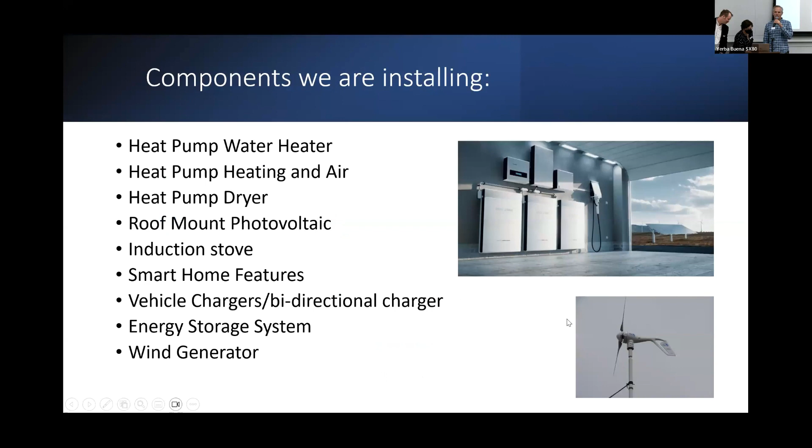I did want to add, when Kellen talked about power outages in Marin County being a primary consideration, I had a very visceral reaction, because I still remember from a few years back when we had an extended power outage, and my wife took our kids and went to Petaluma to her parents' house and left me there, and the fridge went out and I had no food and I got really, really hungry. And I remember finally a cafe opened and I got a panini, but they couldn't grill it. So I still remember I was basically eating a ham sandwich with butter on the outside of the bread.

Anyhow, I digress. Is my presentation up here? Yeah. Got it. Okay.

So I have an architecture firm and I specialize in high performance modern homes. And the technical underpinning of that is passive house or passive building. I'm assuming many of you are familiar. I'll do a quick introduction to that and then talk about a couple examples and then a quick discussion of how code and passive house align and don't.

So what is passive house? It's a rigorous building design and performance standard. It was formalized by European scientists around 1990, and it drew a lot on super insulation and passive solar work in the United States from the 70s, and also low energy building work in Europe following that.

And it sort of turns everything on its head, in my opinion, and it defines the quality of a building by how little energy is required for comfort and convenience. And it offers superior comfort, indoor air quality, and durability. And there are tens of thousands of these worldwide at this point, not just single family, but multifamily, commercial, institutional buildings.

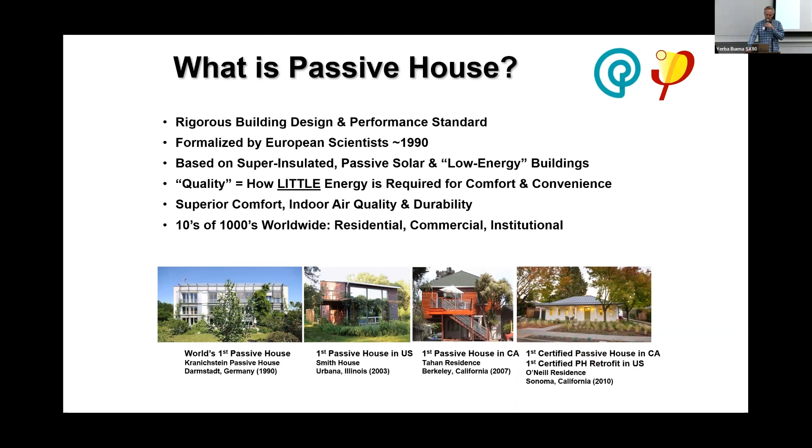And I had the honor of working on this. This is in downtown Sonoma, city of Sonoma. It's called the O'Neill Residence, if you want to look this up.

Anyway, how does passive house work? Optimize solar gains, so particularly in a climate like this, not just getting solar gains in winter, but excluding them in summer. A draft-free building shell. Heat recovery ventilation is typically used. Continuous insulation, high performance windows and doors, efficient equipment, appliances, and lighting. And lastly, this is where it maybe gets a little weird, renewable energy at the end of the list. We'll talk a little bit more about that.

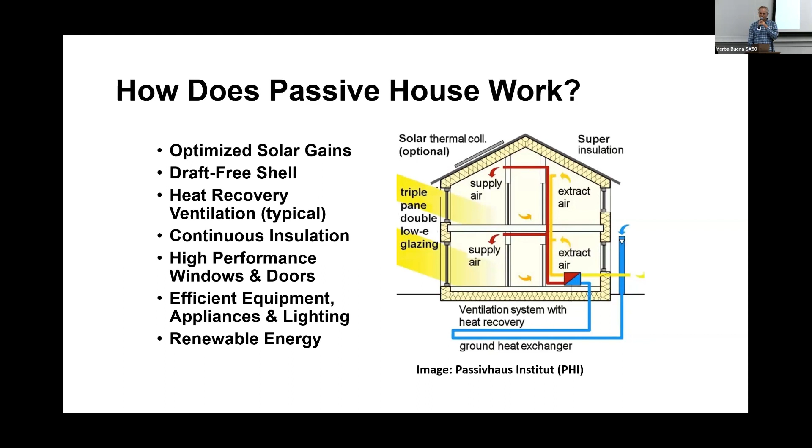Benefits of passive house: health, 24/7 filtered fresh air. We've also been doing a lot of work dealing with wildfire smoke in these buildings. Because you have control over the air entering the building, you have the opportunity to filter it.

And we've found that adding supplemental HEPA filtration at the intake to the ventilation system, you don't want that there all the time because it ups the fan energy a lot. But if you can make that convenient to insert and remove, it's very effective during wildfire events at keeping the indoor air quality high. It's a durable shell, free of mold and moisture problems. In the wealth department, tiny energy bills, high quality construction.

It's immune to changing energy prices and policy. And a thing I like to talk about is I view these buildings as thermal batteries that can store their heating and cooling. And we'll see some examples of that shortly. Happiness, safe, healthy home for the occupants and the planet, legacy buildings, quiet, secure, and comfortable interior. And I also refer to these with my clients as sanctuaries in the modern world.

I've been doing this since 2008. And every time I go into one of them, I'm really taken by how quiet they are once you get inside, with the doors and windows closed. If you want to hear birds chirp or cars go by, open the window, no problem. It's just that you can close them if you want.

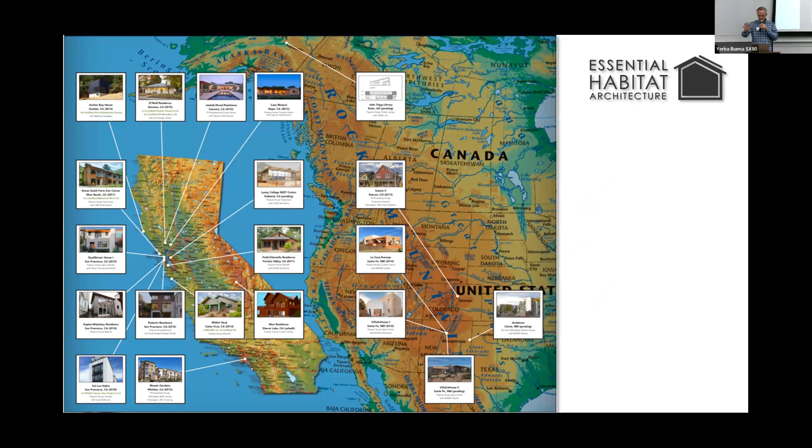This is a kind of a snapshot of projects that we've worked on since 2008, give or take. There are a few more in the works and a few more not on here, but we've been at it for quite a long time. Most of our projects are clustered in the Bay Area, but we're always looking to stretch out and expand to the other 15 climate zones that we have.

This is the first project I just wanted to examine. So this is the before. This is called Midori Haus in Santa Cruz. It was a 1922 craftsman, and we remodeled and retrofitted it to passive house. That's the front view. We talk about indoor outdoor living, not a very inviting connection to the backyard in the first place, but our remodel did a lot more to connect the occupants to the landscape.

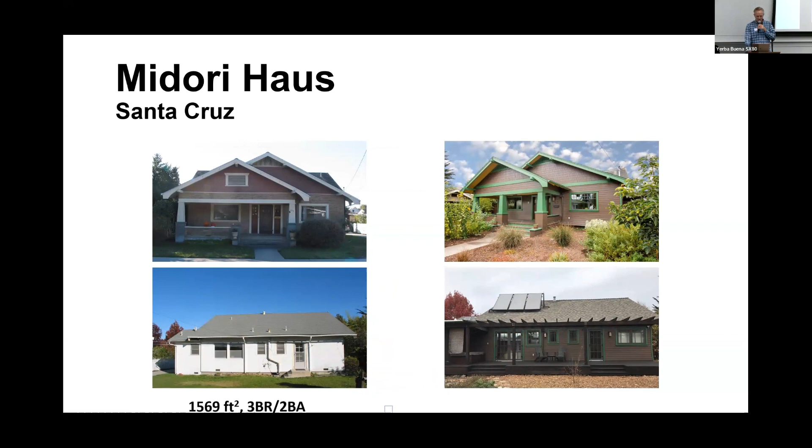This is the existing floor plan and the revised floor plan, and the clients didn't want to expand, so we just reconfigured and utilized the interior space, added decks to the outside, adjusted some of the glazing positions, and just made it updated for modern living.

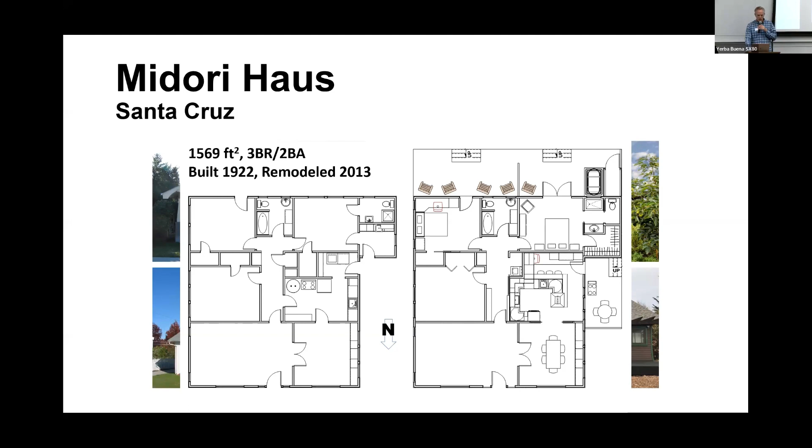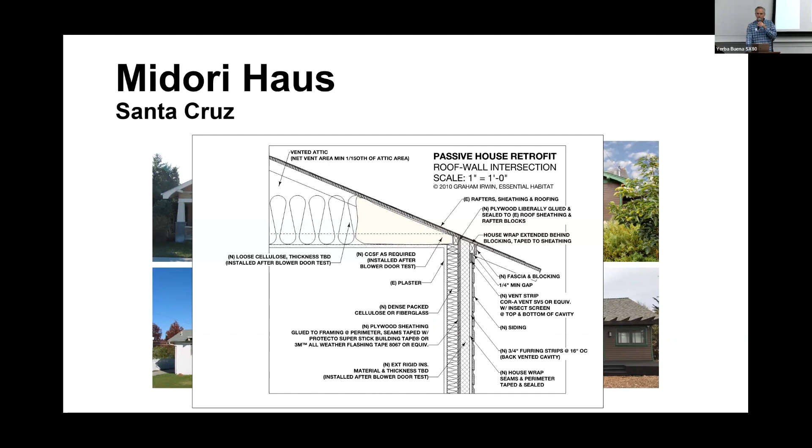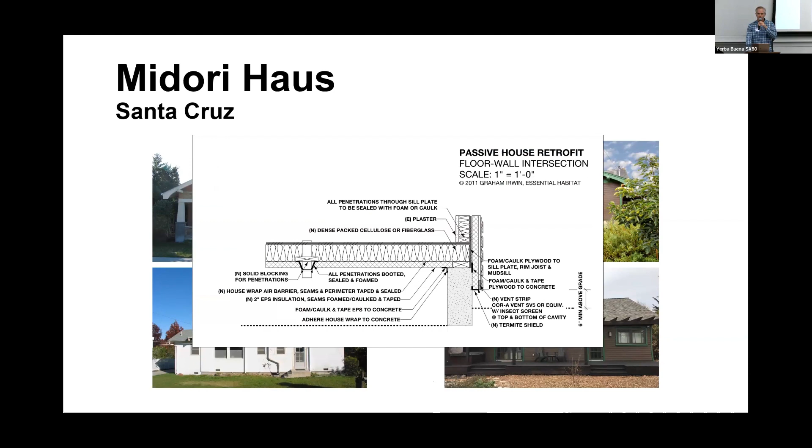And this is a detail of connection. We basically re-sheathed the building, put 3¼ inches of exterior rock wool insulation on the outside. That's basically the wall. Took a lot of care to make sure it was air sealed, but not insane amounts of insulation or any materials like that. Likewise on the floor, the main exercise here was getting the air sealing done. And I heard from the contractors that crawling around in the crawl space doing that was not much fun. So you do what you got to do.

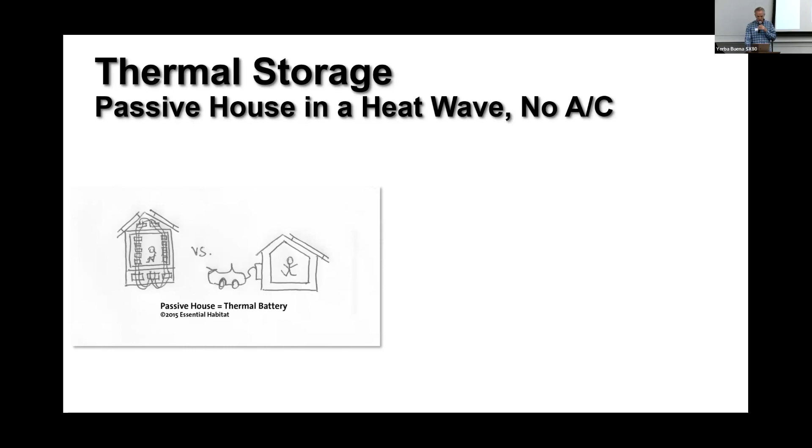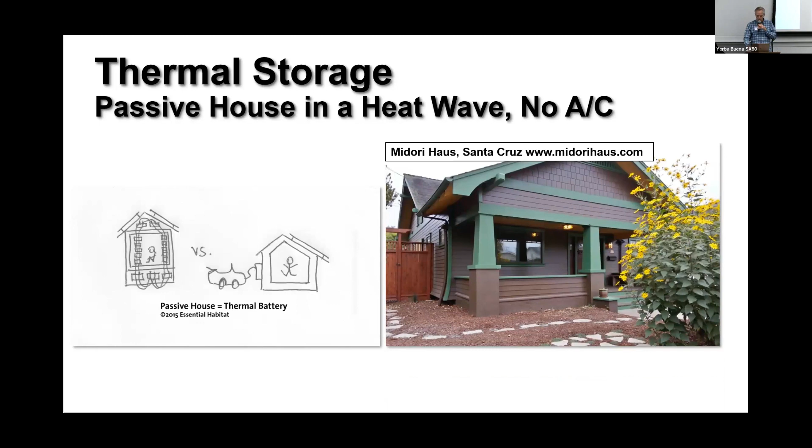So here's an example again of Midori Haus, in Santa Cruz, and it has no air conditioning, but they do have freak heat waves now and again. So their cooling is night cooling. When it's evening, night, or early morning, they'll open the windows to let cool air in, and then they close the windows and doors to get through the day.

There was a heat wave in May. Apparently these happen there. It got up to 103 outside, and the warmest temperature during that day was 76 degrees inside, with no cooling whatsoever, with the ventilation system running as well. So even if you're in a climate that does require air conditioning, this kind of resiliency enables you to conveniently run your air conditioning.

You don't need to run it at peak time. You can choose what time of the day or night to run it because the building itself can hold that temperature. Likewise, in the winter, it can hold the temperature. So you could choose a convenient time to run your heat pump, be it when the sun's out and the solar panels are running or whatever. It lets people adjust and decide when they condition their home, not be forced to follow peak conditions.

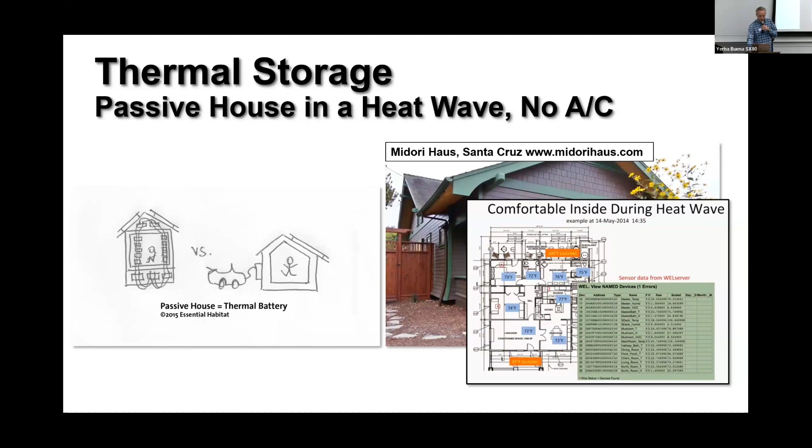In terms of seasonal demand, this is just a look at their electric and gas bills. And this building, this was done in 2013. So it has a solar thermal system with a gas boiler backup. The solar thermal system or the hot water system of the house provides the hot water for the house and also provides the heating. But if you look on the right at the utility bill, I think what's most striking is the relative lack of peak through the year.

You know, typical building on the right and the efficient ones, in winter, the gas use spikes, and this one's almost flat year round. So it's doing an excellent job of mitigating what will be the biggest challenge in an all renewable grid. Air conditioning is not the biggest problem, not even close, because you have solar at the time, even if it's a few hours removed.

The hardest thing is providing power in winter because you need a lot of heating. And the reason you need a lot of heating is because there's not a lot of sun out. So solar doesn't help you heat because you need heat because there's not enough sun. You know, it's not an inconvenient situation. It's actually caused by that.

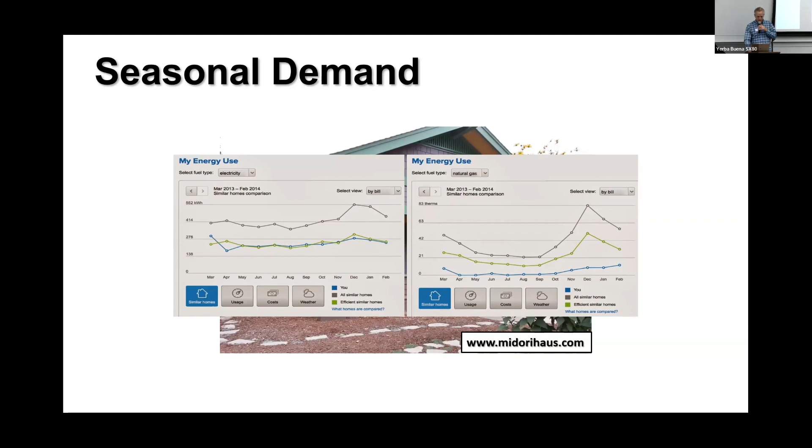Anyhow, the efficiency measures of this building, the fact that Passive House utilizes internal heat gains as well to help warm the building, enable it to get to these levels where there's still heating needed, but much, much flatter year round. And this is just looking at their actual energy use and comparing it to a typical house.

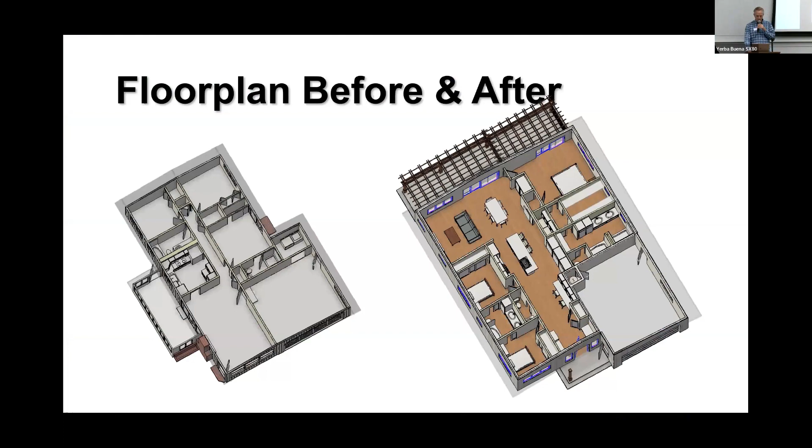This is another project in Sunnyvale in 2019, a mid-century house that we remodeled and retrofit to Passive House. Again, not a terribly inviting rear facade. To get to the backyard, you had to go through a bedroom and out the side. And we changed it to this floor plan, before and after. This one was expanded somewhat, but we basically kept largely to the same footprint, but kind of squared the building off and made it a lot more livable for the homeowners.

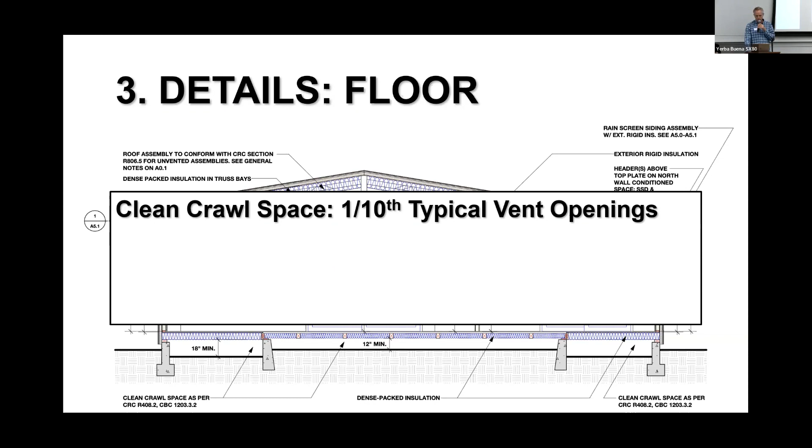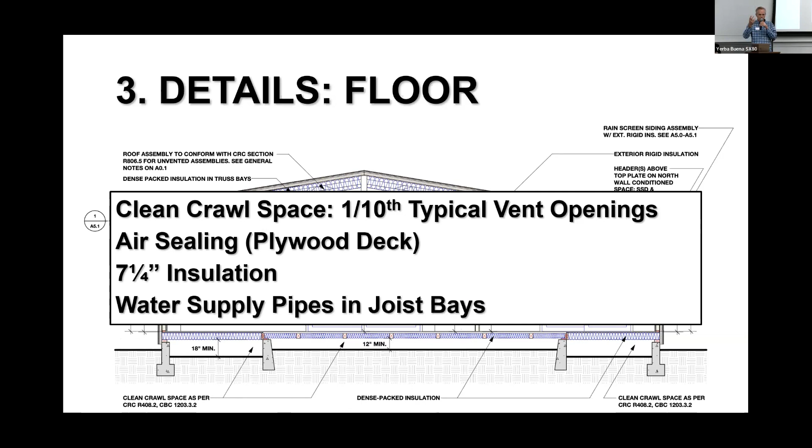Details of the floor on this one. We did a clean crawl space, so we reduced the vent openings to 1/10 of what they typically are in a standard code crawl space. Did the air sealing of the floor at the plywood deck, 7 1/4 inches of insulation, and moved the water supply pipes into the joists so that they're actually inside the envelope rather than outside.

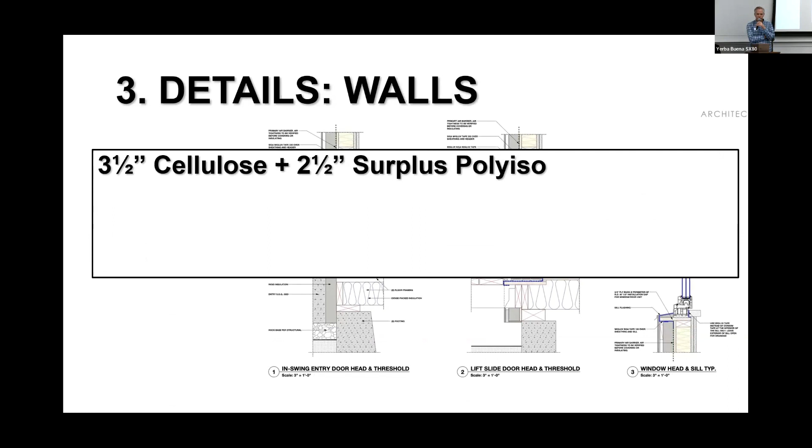The walls, just 2x4 walls with dense pack cellulose and 2.5 inches of surplus polyiso insulation. The contractor located a batch of it, I think, that had been taken off of a warehouse or something. And so they had a stack of that, used that on the outside of the walls. The walls were sheathed with ZIP sheathing, and that was the air sealing strategy for that.

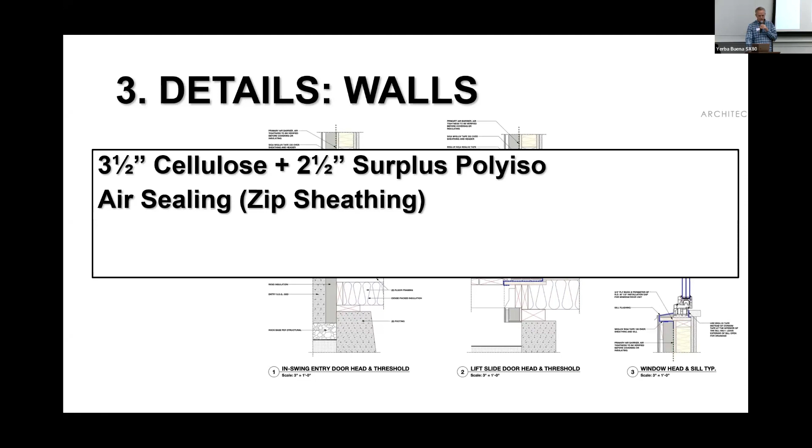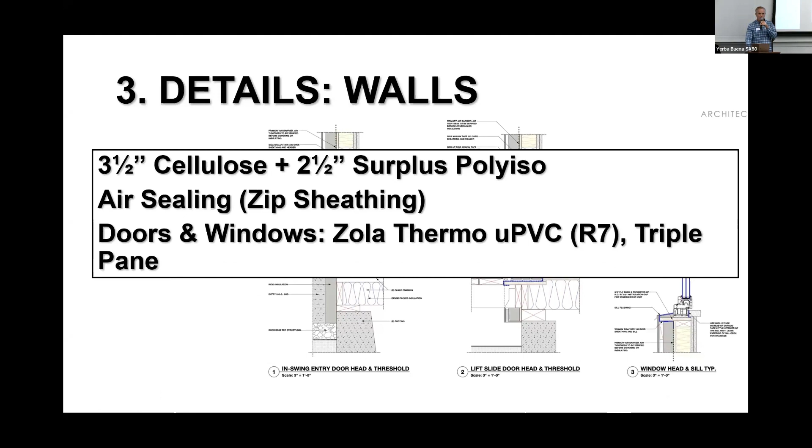And the doors and windows are a European company that we use quite a bit, and they're an R7 window as opposed to an Energy Star, which would be an R3, and it makes an enormous difference in the performance of the building shell.

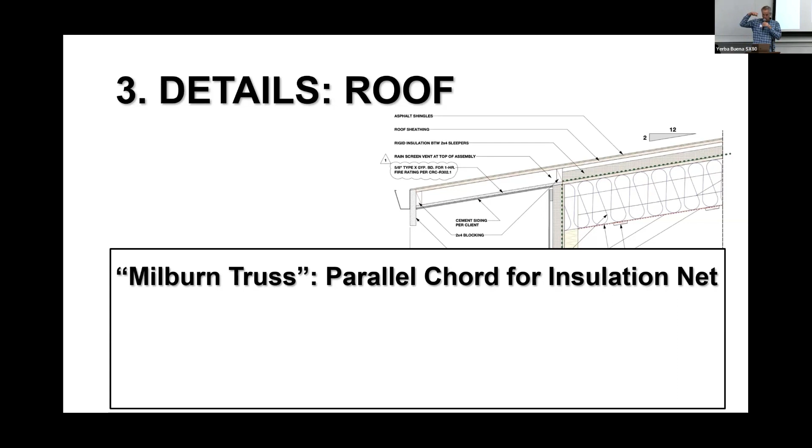The roof, I kind of named this after the builder in Sonoma who I thought came up with this idea, but if you look at the truss, there's an extra parallel chord added to the truss, and that's strictly there just for stapling the netting of the dense packed insulation so that you can do dense packed cellulose easily up against the roof sheathing. And again, ZIP sheathing, the overhangs are actually attached after the air sealing. So we want to get a really good air seal from the roof sheathing to the wall sheathing.

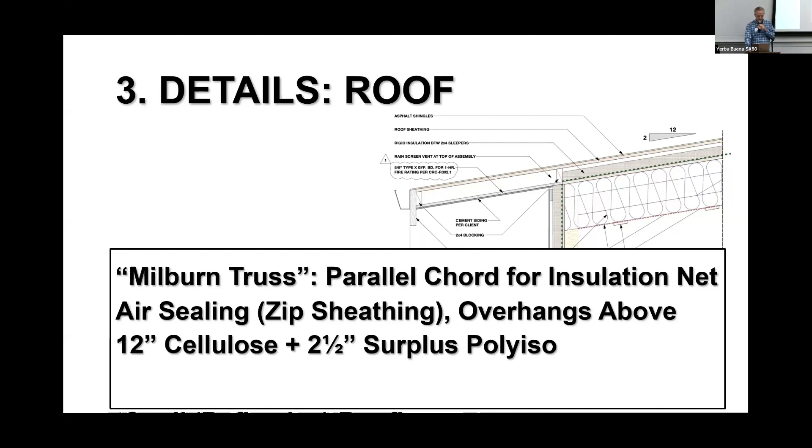So the building ends up first starting with no overhangs at all, and then they're added on top, interspersed with the rigid insulation that we use to give us an unvented roof cavity. 12 inches of cellulose, and again, 2.5 inches of polyiso. And we also use cool or reflective roofing.

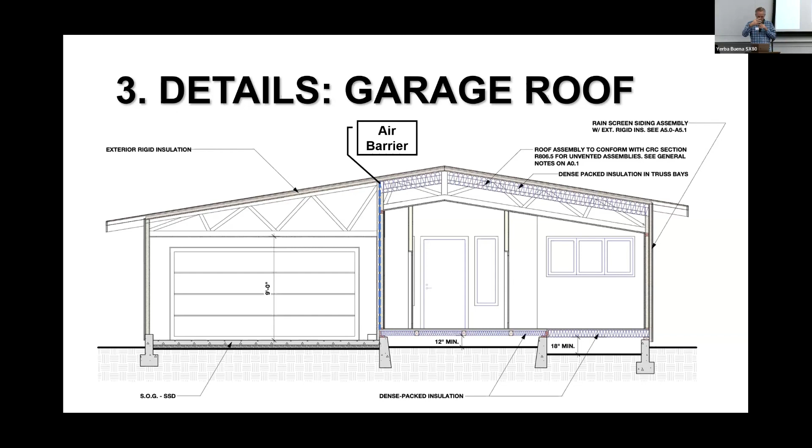Example here in the garage, just thinking through the air barrier situation: in an attached garage, we did a split truss where, even though the roof looks continuous, at this point it's actually split so that we could guarantee that we had wall sheathing connecting to the roof sheathing outside of the garage to keep that unconditioned space separate. And it's also good for indoor air quality.

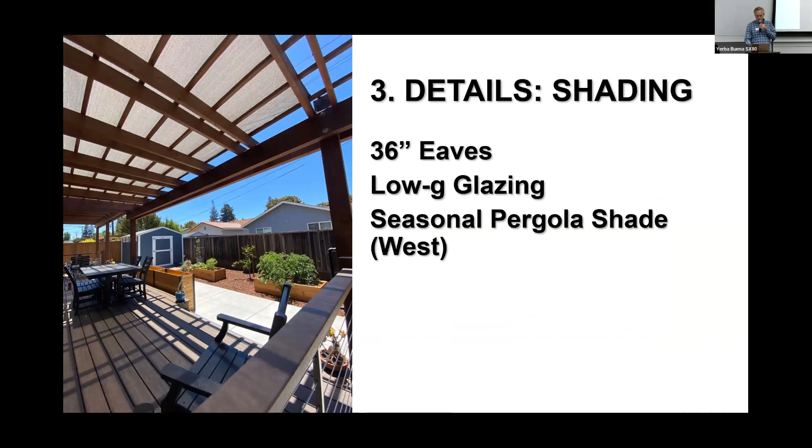The shading details: we did 36-inch eaves, low solar gain glazing. This is the west side of the building that has a lot of glass, but there's a pergola on it with a shade cloth. It could also be done with plants. And then looking at the energy use.

So the client decided that he didn't want to put his photovoltaic system up until he had a year of operation to size it. And then apparently had some difficulties with the fire department because they added Tesla Powerwalls. And so there was some kind of back and forth for months over that. Anyway, the short and long of it was it didn't get fully grid interconnected until the beginning of this year.

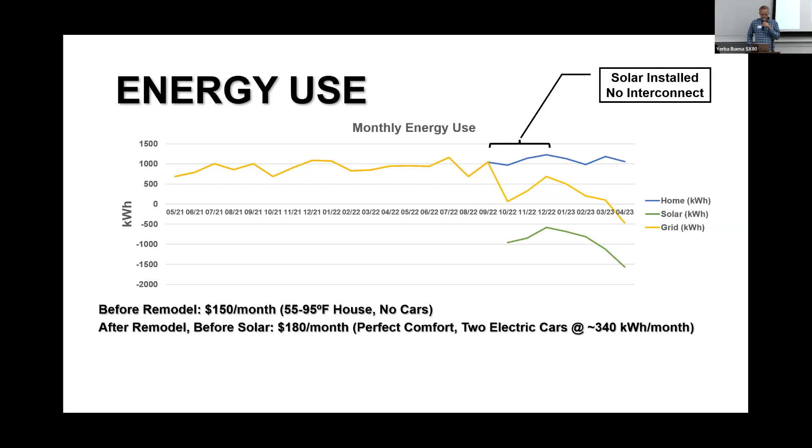But this energy use, I'd add, is also including charging 2 EVs. So this is running an entire all-electric house and providing their transportation. Before the remodel, they were spending about $150 a month, and their house would swing between 55 and 95 degrees, depending on the time of year, no car charging. After the remodel, before they put their solar on, they were spending $180 a month for a perfectly comfortable house and charging 2 electric cars.

With the solar, the first 3 months of the year, they averaged about a $20 a month electric bill. $11 of that was the connection fee. And then April was negative $67. So they already zeroed out the first 3 months of the year with April's solar surplus.

And again, this is early on, but I predict it's going to be symmetrical about December. So I would say that September will take care of October, November, December. So basically the building is off grid from May to August. So the poor guy actually oversized his solar system quite significantly.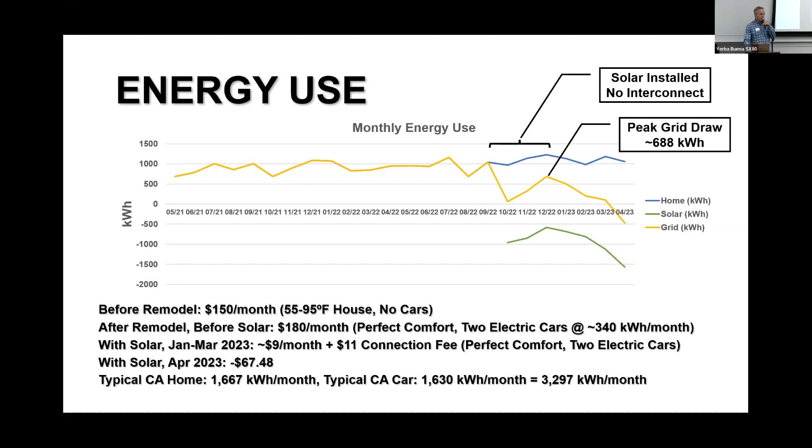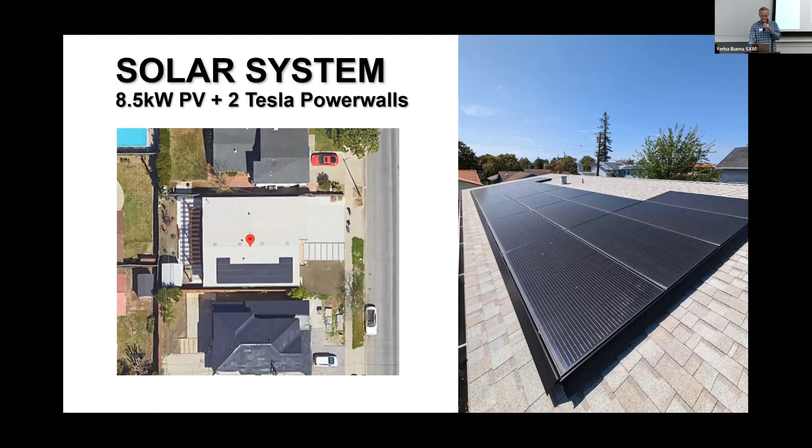I think part of that is because he's got Powerwalls in it, and that's enabling him to harvest a lot more than maybe the modeling would normally have. And the peak grid draw was 688 kilowatt hours. That was the highest month, in December. Biggest draw with PV connected. And this was done with 8.5 kilowatts of PV and 2 Powerwalls. And you can see that there was plenty of roof space left. And as I said, it's probably larger than needed for net zero year-round performance.

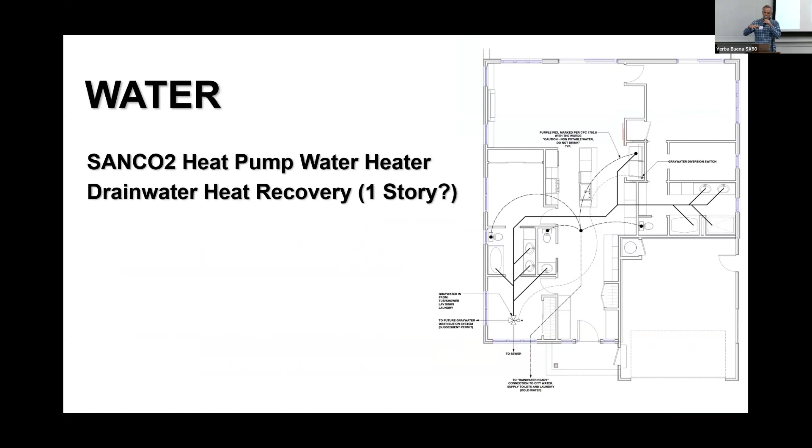So these are aspects that I include in California for both water heating efficiency and water use. This is a CO2-powered heat pump water heater. Drain water heat recovery we didn't do in this building. That typically requires 2 stories, but there are some units coming out that go in the floor of the bathroom for the shower, which we're exploring. Structured plumbing to deliver hot water quickly with minimal waste.

Rainwater ready. So again, this is a standard thing we do. We just plumb the cold water laundry and all of the toilets with dedicated lines that all connect to an easily accessible point, and they'll connect to city water. But the point being, if somebody wants to either immediately or later implement a rainwater harvesting system, you don't have to tear the house apart. It doesn't cost much to do it when you're doing the construction. Later on, it becomes a big deal.

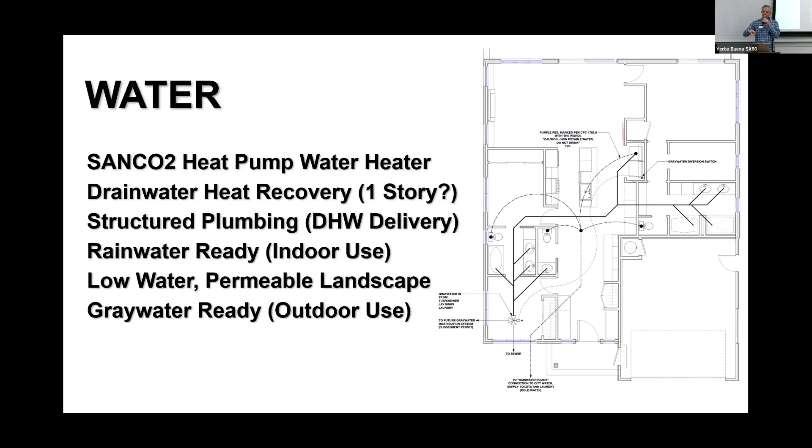Low water, permeable landscape, and also gray water ready. So again, when we put the drains in, we organize those so that whether they have a gray water system implemented now or later, it's a matter of connecting that system. It's not a matter of installing the plumbing through the whole house.

In terms of air quality, this is a heat recovery ventilator, a Zehnder heat recovery ventilator, and it's basically a centralized ventilation system that continuously draws stale air from bathrooms and the kitchen and the laundry area out of the building and supplies filtered fresh air to all the other rooms. So you've kind of got this silent cycle of fresh air through the house.

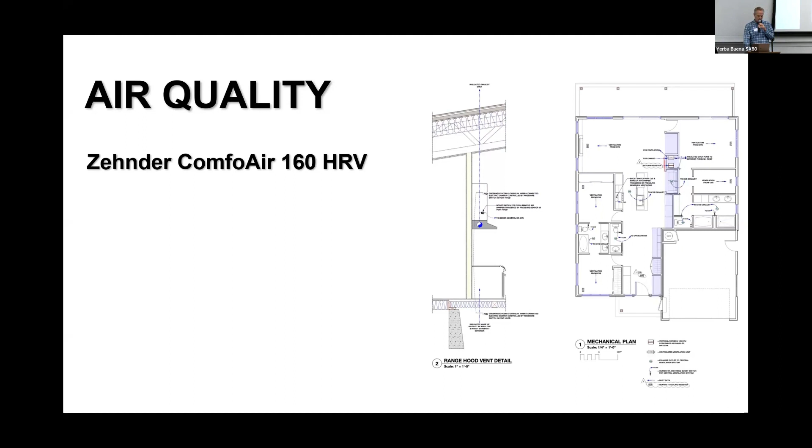And as the air is being extracted, this thing's got a heat exchanger in it. So if it's, say, cool inside and hot outside, the air that you're taking out of the house will cool the air coming in. Vice versa in wintertime, if it's warm inside and cold outside, the warm air that you're taking out of the house will warm the air that comes in. So you're continuously turning over the air, but recycling or retaining the temperature of the building. And this is 80 to 90% efficient at that.

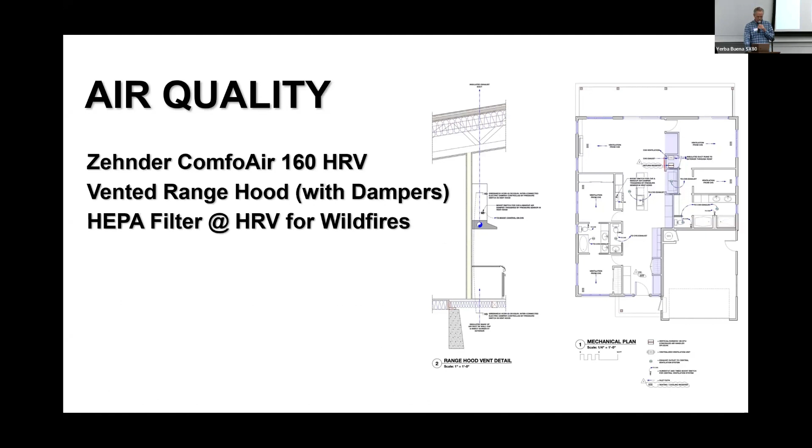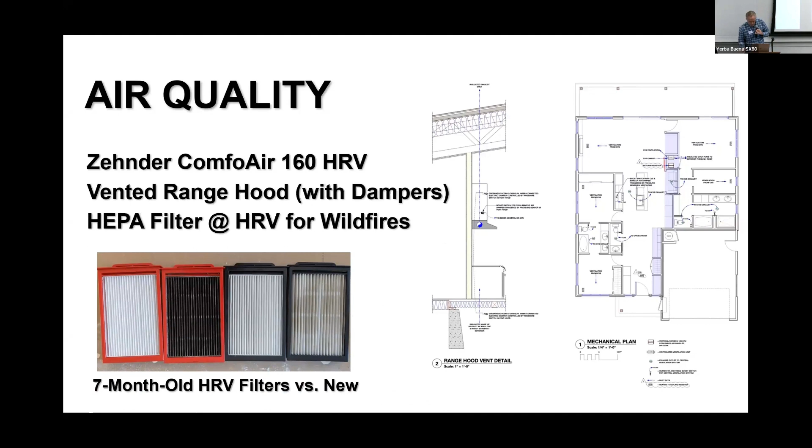Vented range hood with dampers, HEPA filter, again, a supplemental HEPA filter for a wildfire. And this is a look at 7-month-old filters in the heat recovery ventilator. So you can see what they didn't breathe that most of us do. And, you know, it's just a really nice house as well, which is important to me and them.

How are we doing on time, by the way? Couple more minutes. So I'm going to get even faster now. And this will be available later, and I'm happy to answer follow-up questions.

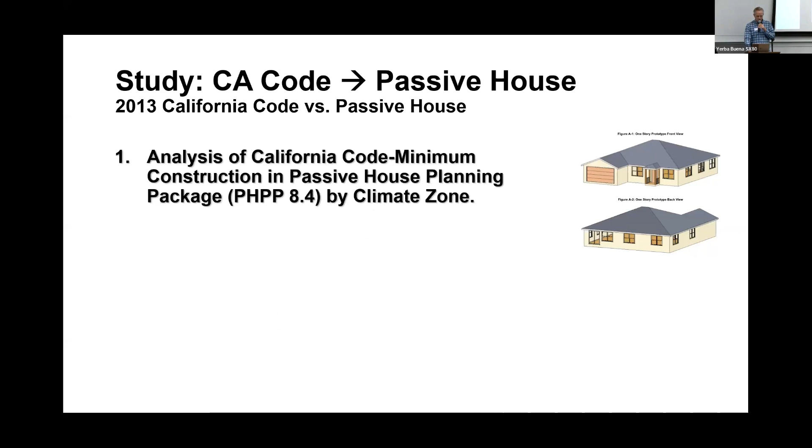I know I just have so much to share, but this was a study I did, again, trying to expand uptake of this. I took California code and this is a prototype home from the energy modeling from Title 24 and upgraded it to passive house in all 16 climate zones. And the results look something like this. On the left side is the code, the same house built to code in each climate zone. And on the right is where our optimized buildings wound up.

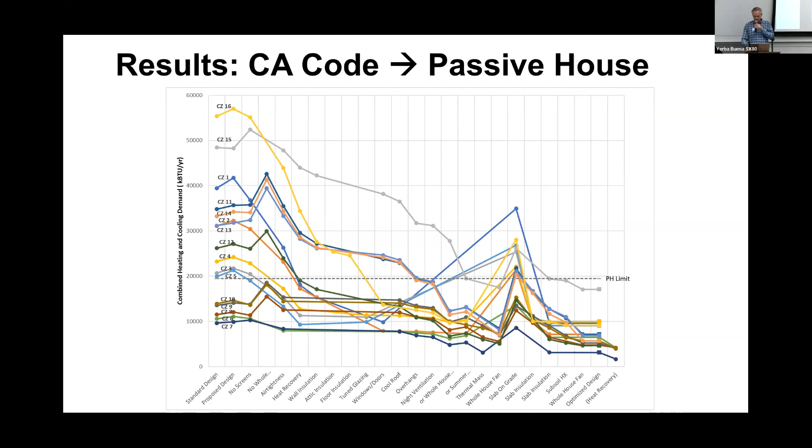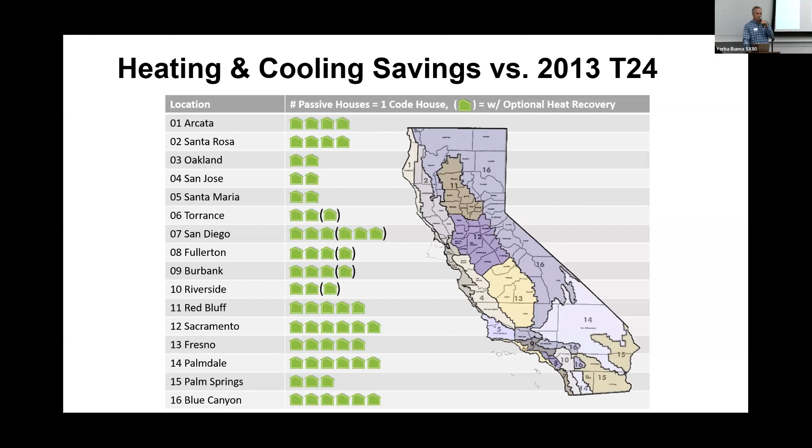The big bump that you see in there is because I started out with a raised floor, and then I switched it to a slab on grade. And since code doesn't require any under slab insulation, I ruined my house and then I fixed it again. And this is just a quick look at how many of these optimized buildings could be heated and cooled for the same amount of energy as the code house by climate zone.

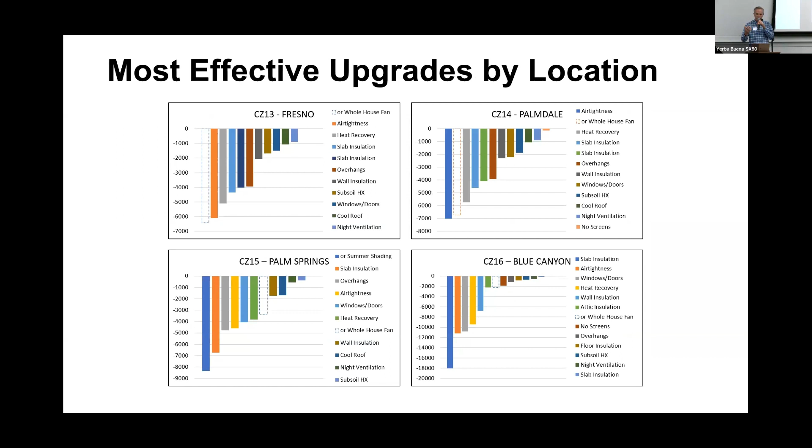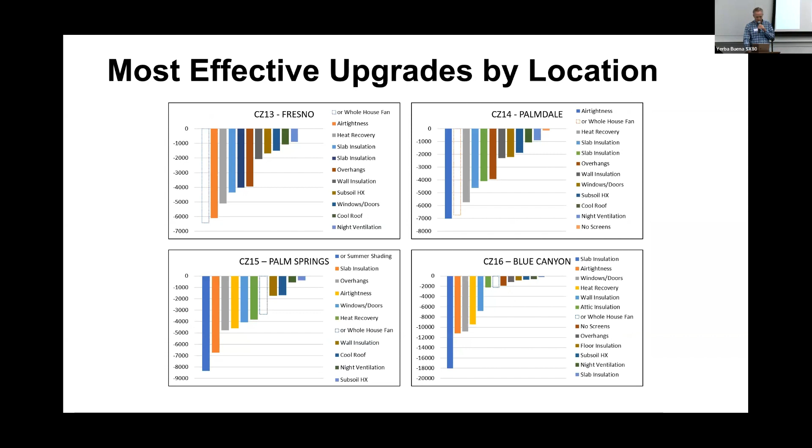And just looked at, again, the most effective upgrade by location, and almost without fail, it was either under slab insulation or air tightness in every climate zone. That was the most effective upgrade available. I did add a couple more slides that will be in the PDF that have a little bit more data on this, but didn't get them in for the purposes of this.

One thing I guess I wanted to say about code, it was tricky to compare passive house to code because code doesn't actually have a standard. It compares every building to itself, as opposed to passive house, which has an objective standard of this energy limit. So to compare it, I had to pick a particular house. I picked that prototype Title 24 house because code has a different number for every building in theory. And so this is kind of an example of the difference between performance and modeled compliance, a little dated, but I think still effective.